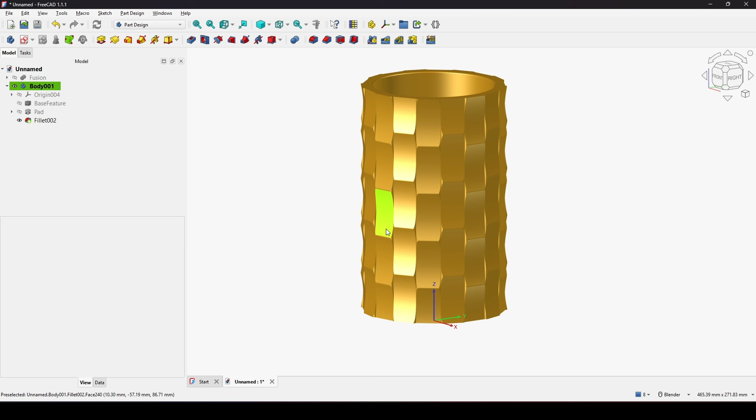I will start in the part design. I will create a new body and a new sketch in the XZ plane.

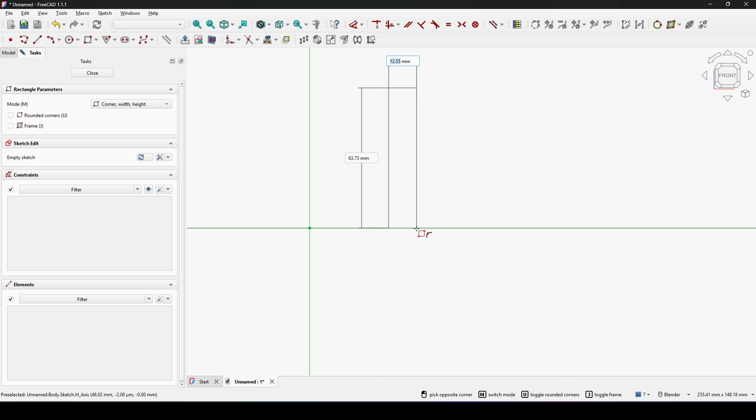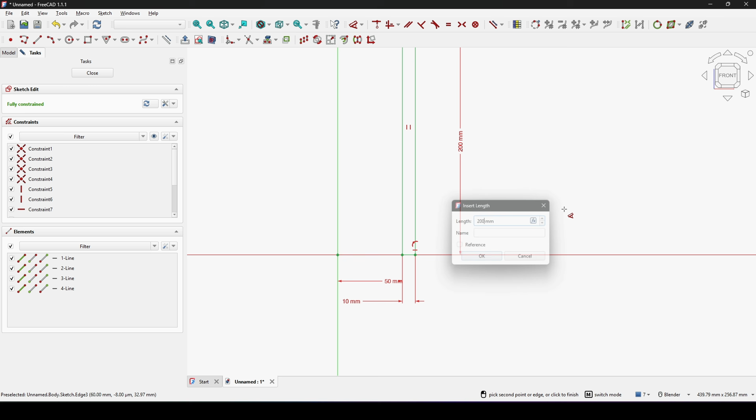I will create a rectangle, something like this, and touch the red line. Select this point and hit D, set the inner radius to 50, and the length of this line to 10. I select this line and set it to 200. Something like this. Then I close.

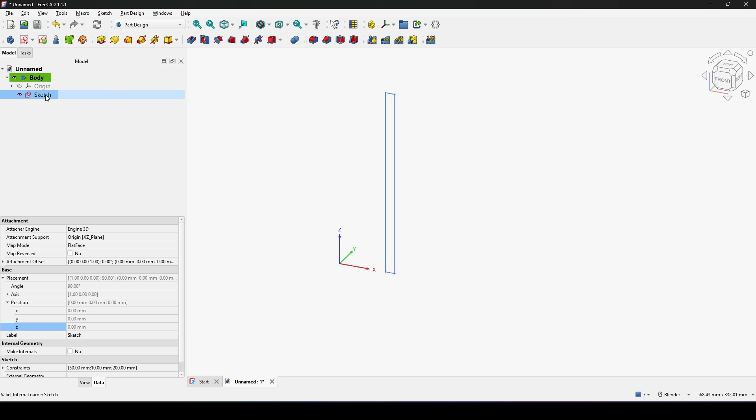Now I will go to the view and toggle the axis cross to show the arrow. Now you can see my sketch is away from the center, a distance. I will select the sketch and go to revolve. I don't want a full revolve, just 20 degrees, and I go to symmetric to plane to make it centered on the sketch. Click OK.

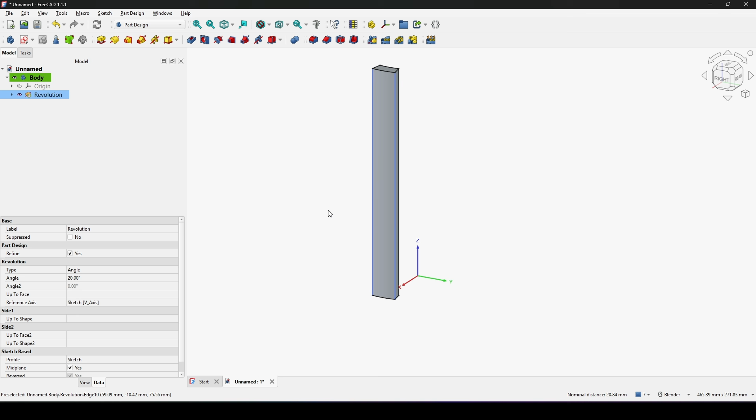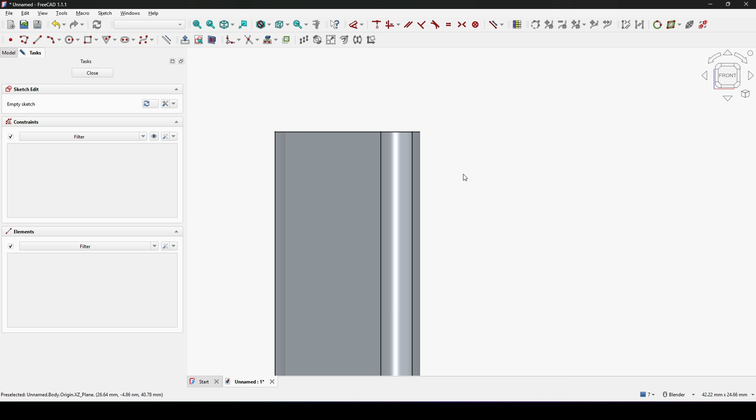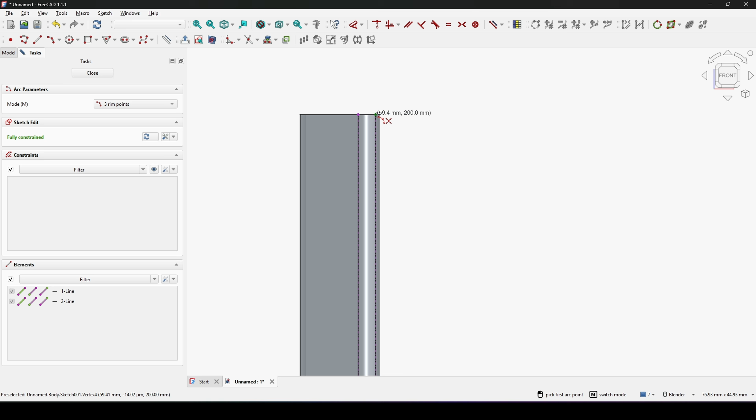Now I will create a new sketch in the XZ plane. Zoom close here. I hit G X and reference this line and then this line. Select these two lines, hit G and N to turn that into construction. I create an arc, starting from here to here.

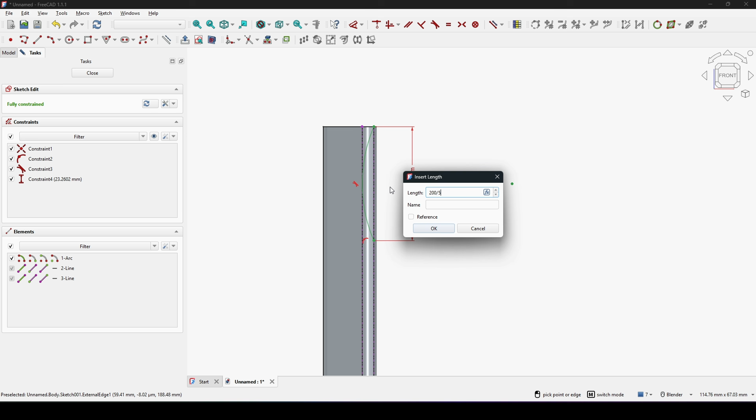Select this arc and this line, hit T for tangent. Select these two points, hit D, and set the length. I will type 200 and divide by 5, because I want 5 cuts.

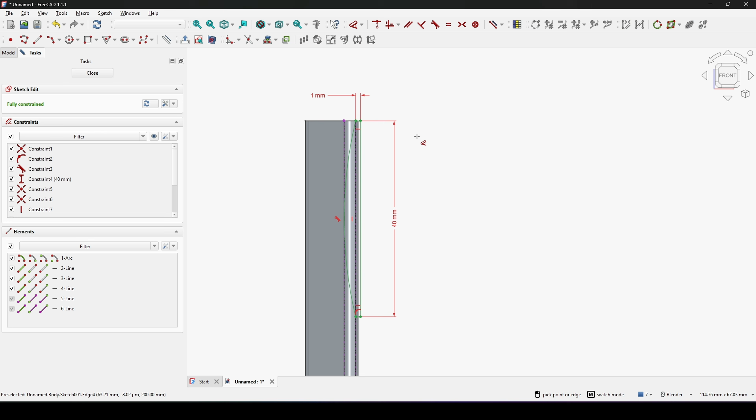Now I will create a rectangle. We start from here. Select this point and this point, hit C. Now I select this line and delete it. Select this line, hit D, and set it to 1. Close.

Now I will pocket this sketch. I go to symmetric, then through all. Click OK.

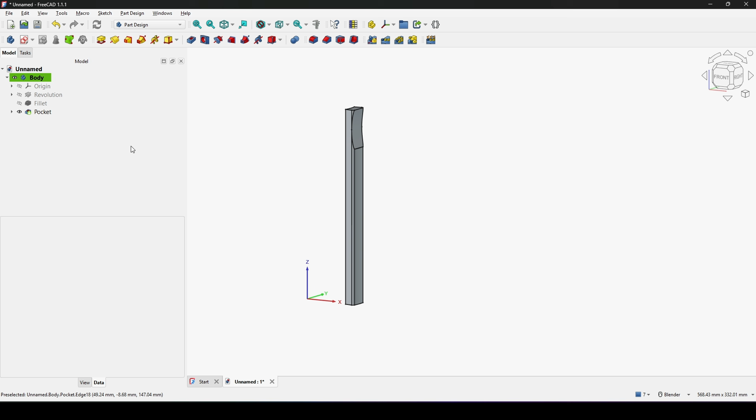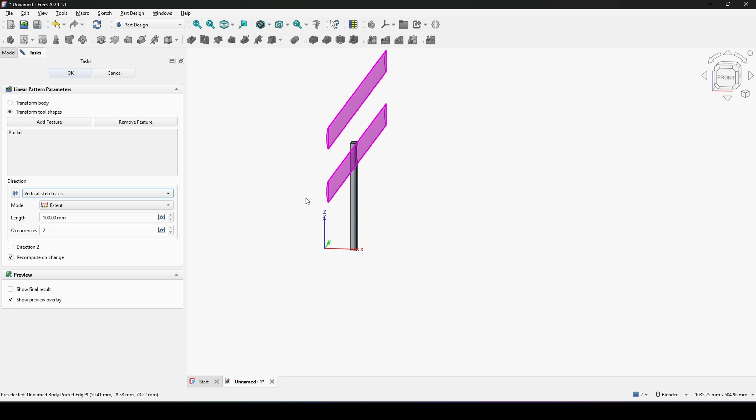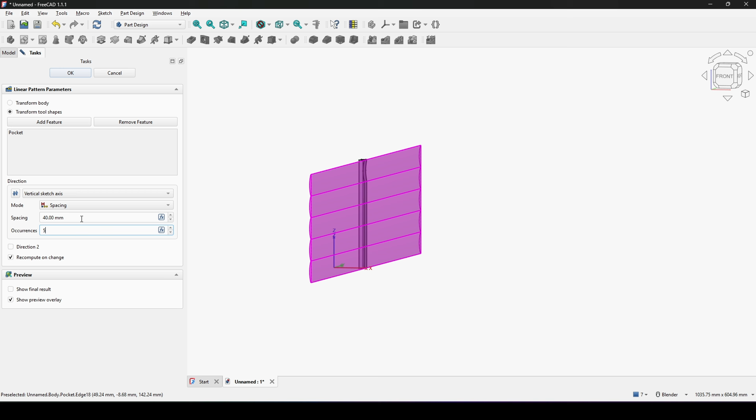Now I select the pocket and I want to linear pattern it, so I go to linear pattern. I want the direction to be the vertical axis, and I want to flip the direction. For the mode, I want spacing, and the spacing I want is 200 divided by 5. The number I want is 5. Click OK.

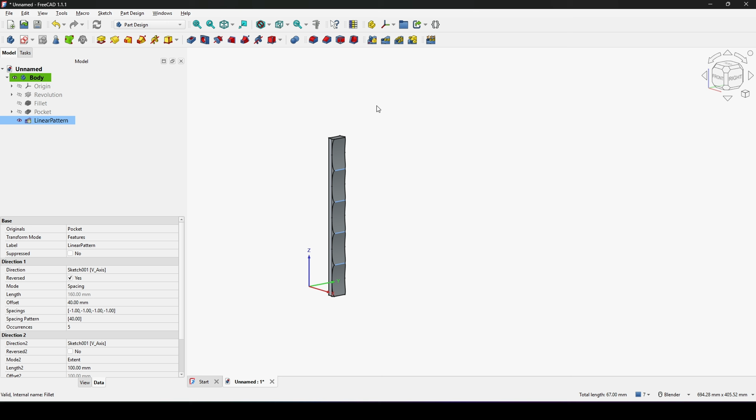Now I want to fillet it, so I will Control select this edge, this edge, this edge, and this edge. I will fillet it. Let's go to show. Click OK.

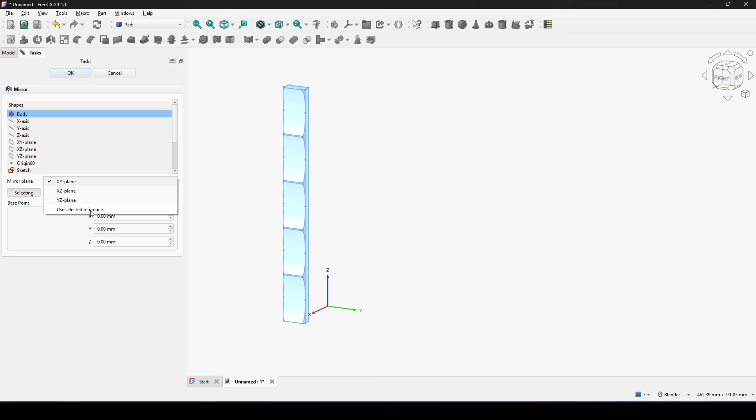Now I can move to the part workbench and select the body. I want to mirror it, so I go to mirror. Choose to use the selected reference, and I choose this face over here. Click OK.

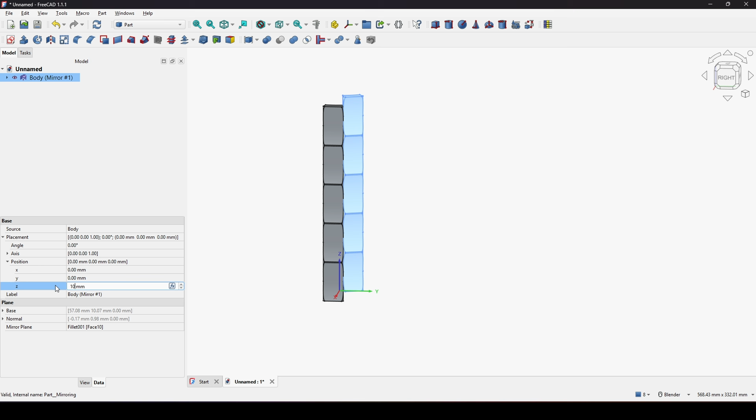Now I can move the mirror up. I select the mirror and go to placement, position, Z axis, and move this one up to 10. So you can move it up to whatever distance you want.

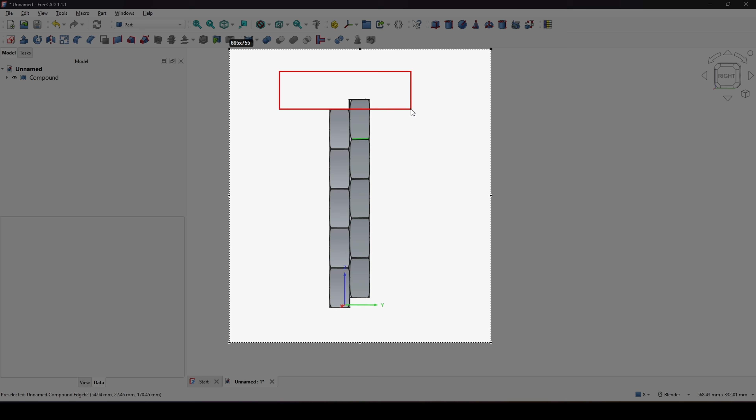Now I can select the mirror and the body, and go to Part, Compound, Make Compound. The next step is I will remove this geometry up here and this geometry down here.

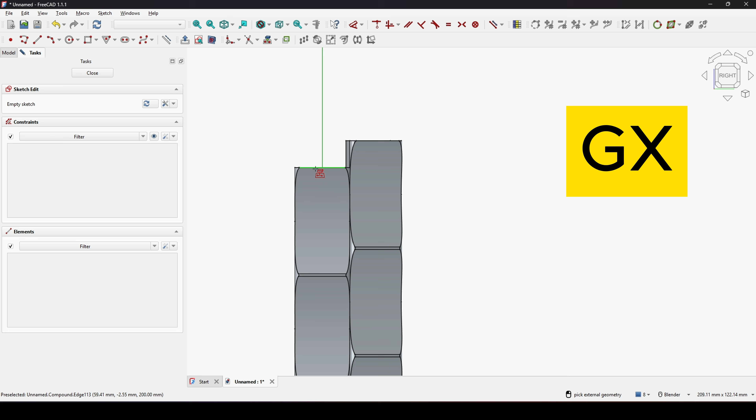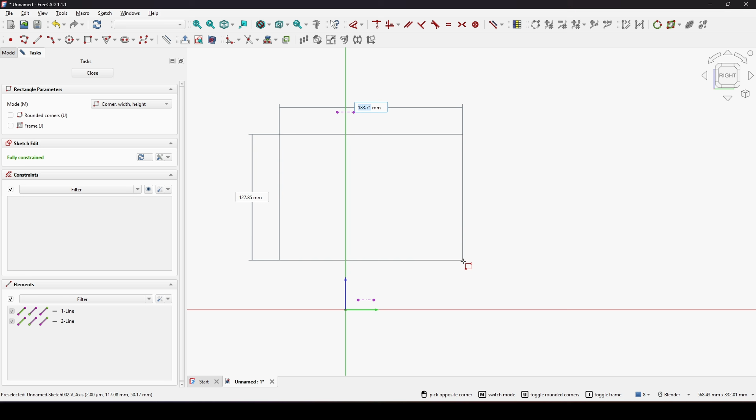I will create a new sketch in the right view, and toggle the section. I hit G and X, and reference this line, and then this line. I toggle the section again, select these two lines, and hit G and N to turn that into construction. I create a line, a rectangle.

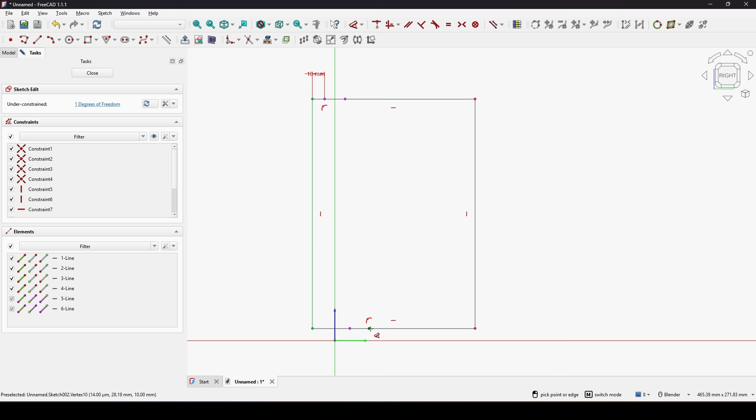This line and this point, hit C. The distance between this point and this point, I will set to 10. Also the same here. Then I close.

I will extrude this sketch along the x-axis. We set it to 10.

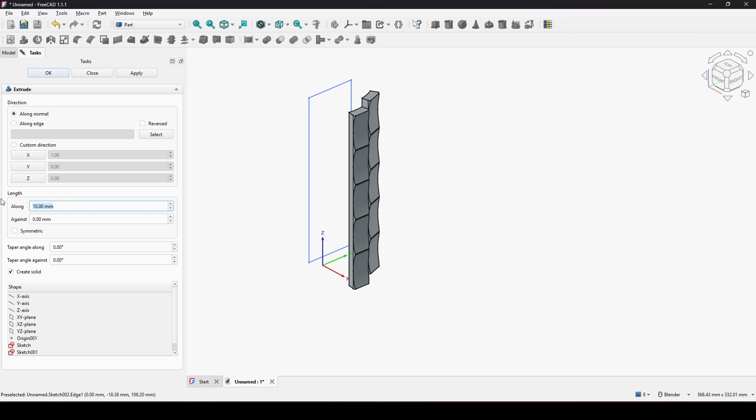Now I will Control select the compound first, then the extrude, and go to intersection.

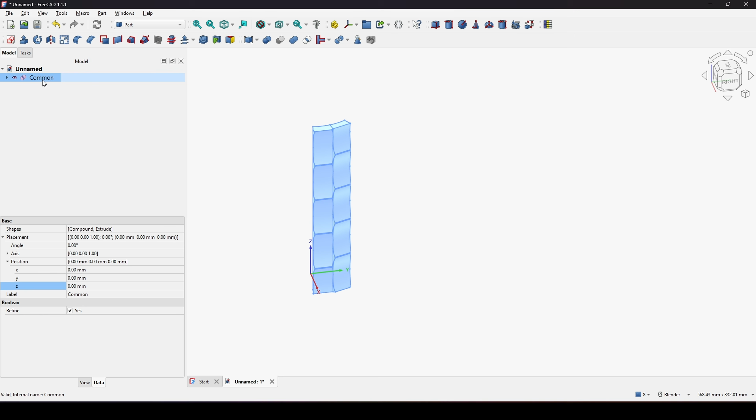Next I want to create a polar pattern of this. So I select the command and go to the Draft workbench, then modification, array tools, and polar array. Reset point, set this one to 9. Click OK.

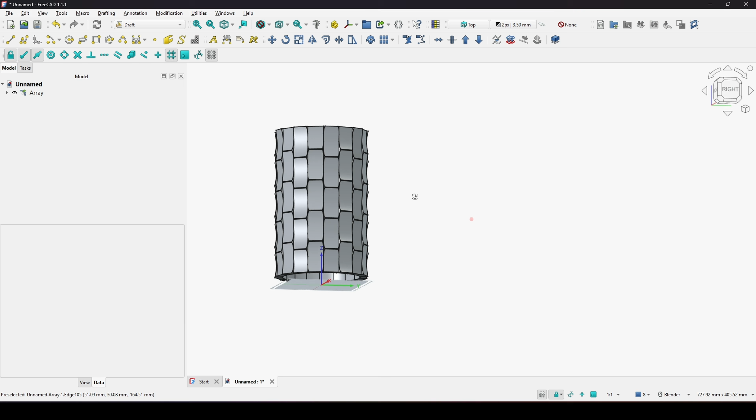Now I will select the array and go to the part workbench, and I'm going to union them together. Click on union.

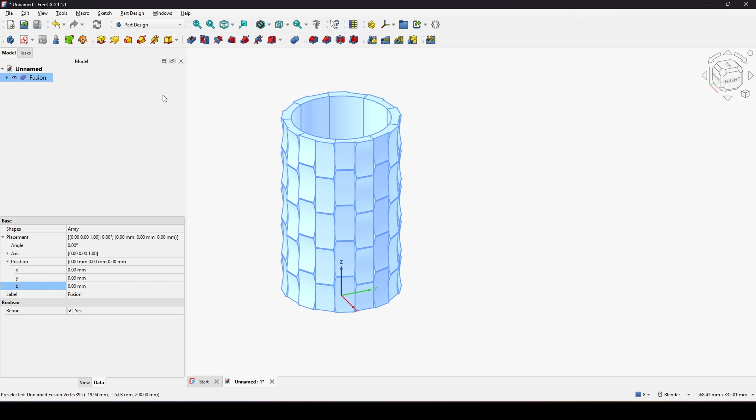Now I select the fusion and go to the part design workbench. Select the fusion and create a new body based on the fusion. Click OK.

I select the bottom face and create a new sketch based on this face. I create a circle and set the diameter to 105. Close this.

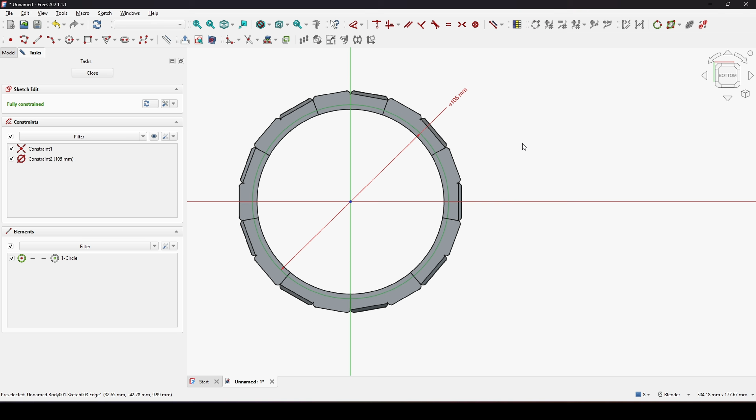Now I'm going to pad this sketch up, so go to pad, and go to reverse. I just want to go to 10. Click OK.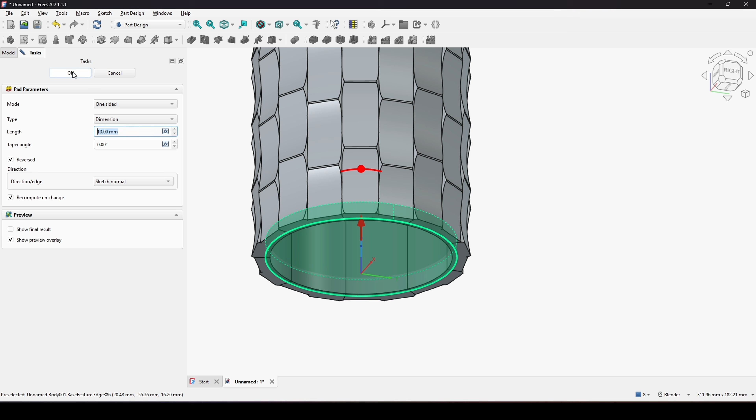Now I can Control select this edge and then this edge, and go to fillet. 1 is okay. Click OK.

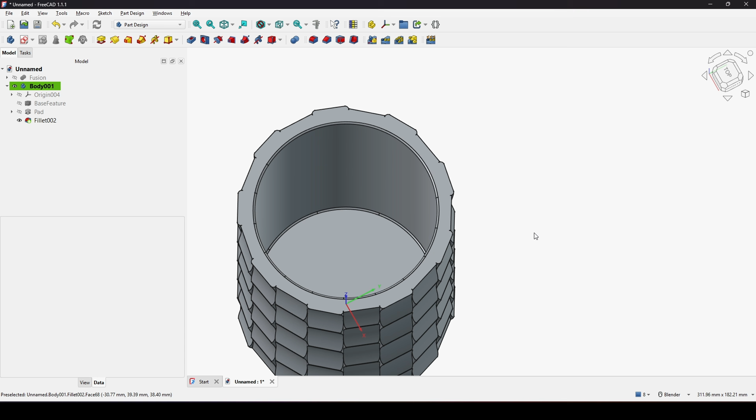Okay, now we finish modeling the pen holder. So that's it for the tutorial. Thanks for watching and see you in the next video.